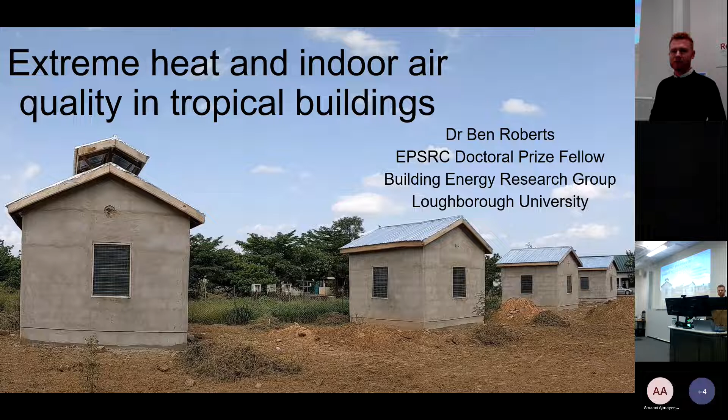So just a quick background on me. I joined Loughborough 8 years ago. I was part of the CDT, similar to IRBI. It was the precursor to IRBI, which we're all part of today. But prior to that, my first degree was actually in geography. I don't come from a hard engineering background. And then I first got interested in energy with an energy policy master's, also at Exeter. And then since then, I've been at Loughborough doing my MRes, my PhD.

And then since 2019, I've been a research associate working on 4 different projects. And it's REFIT, which is the one I'll focus on today. That's the first project that got me involved in doing research in tropical climates. And then this year, I've just started my doctoral prize fellowship, which is all about doing research in tropical climates. But just to identify a few of the key collaborators, I'll probably mention these names today, so I thought it's best to talk about them up front.

We've got Professor Kate Gough from Loughborough University, Department of Geography. She's someone who's really influenced my career in the last 2 years. She's been working in Ghana for over 30 years, and she has set up 2 recent projects. She's actually a social scientist herself, but has become really interested in the way that people experience heat in their homes. And she's very interested in how people who have home-based enterprises work under extreme heat conditions.

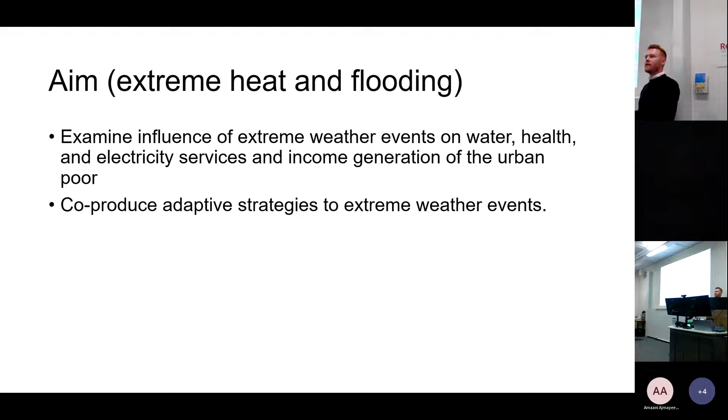events, heat and flooding, affected water, health, electricity services and also income generation with a specific focus on the urban poor. And then they wanted to start looking at adaptive strategies to these extreme weather events, and they didn't quite get there. And that's where REFIT, which is the next project, comes in. So I'll be talking today purely about our research in Ghana. For those of you who perhaps aren't aware, it's a country in West Africa.

There's the three largest cities. We work in two of those. We work in Accra, which is this city right in the south of the country, the capital, by the coast. It's very warm most of the year, but very humid. I've been there when it's been probably late 20s, early 30 degrees, but around 80 to 90 percent humidity. So really hot and humid, very uncomfortable to be in.

The second city we work in is up in Tamale in the north of the country. This is very different. The heat is a lot higher. We've been there when there's been 42, 43 degree weather, but the humidity tends to be quite low, around 10 or 20 percent. So actually I find Tamale much more comfortable to be in because you can evaporate your sweat and cool down despite the much higher temperatures.

We know that climate change is going to be a significant issue for the whole of the African continent, and there will be asymmetric warming, particularly along the African continent. In Ghana alone, about a quarter of the population is identified as poor. So these people are particularly vulnerable to high indoor temperatures and heat because they can't afford things like air conditioning.

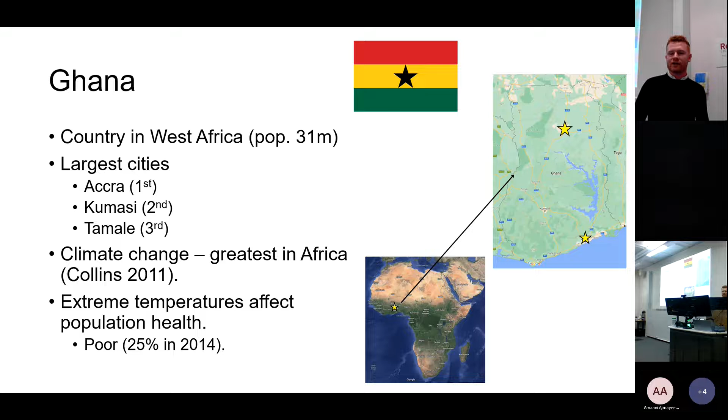We at the moment almost universally work in informal settlements. This is an example of an informal settlement that we work in Accra. This is called Agbogbloshie, which is famous for the world's largest electronic waste dump. So a lot of the electronics that you throw away, if they're not properly recycled, end up right next to this settlement. And informal settlements are places where the urban poor live.

They tend to be not government approved settlements. So at any point, the government can come in and destroy all the homes in this area. And so people tend not to want to make massive investments in their living environment. Also, people just don't have much money, so they can't make a lot of improvements to their homes in terms of adapting them and retrofitting them to make them more resilient to extreme heat.

The previous project looked at indoor temperatures, so air temperatures, dry bulb temperatures only. I know I've just mentioned the importance of humidity, but the early project just looked at temperatures. Working across the two cities, Accra and Tamale, they monitored indoor temperatures in over 130 homes using these very small, tiny tag sensors. They're waterproof, they have quite a good battery life, and they're quite strong and tough, so they're a good solution for monitoring temperatures in this kind of environment.

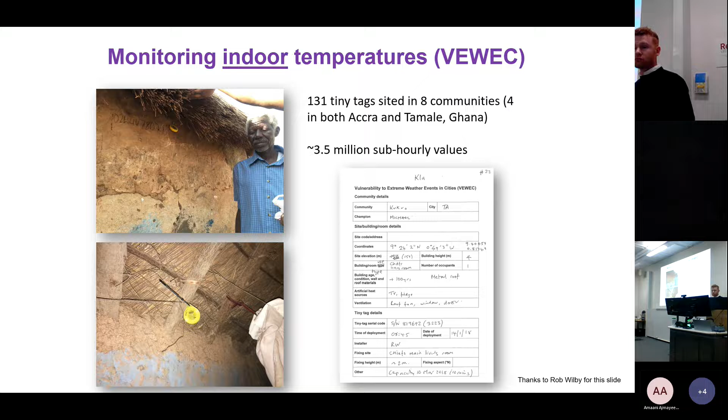And they sampled a number of homes which encompass different building types, different materials. So, for example, a thatched roof, a tin roof, wooden walled houses, concrete walled houses, houses that were under the shade of trees, houses that were exposed, and started to compare the temperatures that were recorded in all these homes.

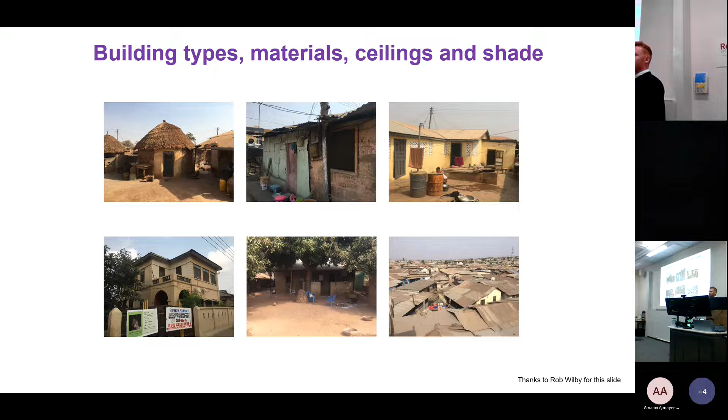What was quite shocking is some of the temperatures recorded were very high. The highest temperature here, 45.5 degrees. This is a living room. It's right next door to a bakery, which probably contributes to some of the heat. The oven is in a big room next door with this living room attached. They bake bread all night long, which is the time when about 8 or 12 women sleep in this room with their young children.

It's otherwise quite poorly ventilated. You can see this small window here - that's the only ventilation in that house. And you think 8 or 12 adult women plus children sleeping in there. It's quite uncomfortable.

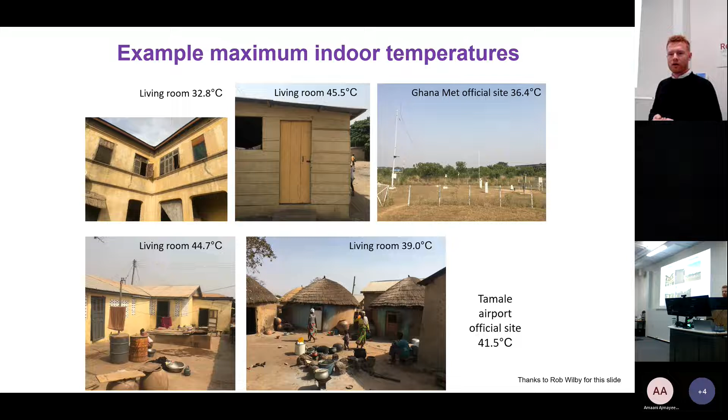One of the key comparisons that was made was the effect of roof material on indoor temperature. They contrasted thatched roof dwellings with metal roof dwellings. On the x-axis we have time, and on the y-axis we have temperature. The dark solid black line is the outdoor dry bulb temperature. The brown lines on this graph are the indoor temperatures in all the houses with thatched roofs, and on the right-hand side we have the indoor temperatures in all the houses with metal roofs.

What you can see is that with the thatched roof, the indoor temperatures were generally quite stable. They didn't fall very far off in the night, but equally they didn't shoot up during the day. Contrast this with the metal roof - massive increases in temperatures during the day, but comparatively lower temperature at night. So what we can say from this is if you want to spend your time in a room during the day, go in a room with a thatched roof.

If you want to sleep in a room, choose a metal roof. Unfortunately, most of the rooms in the settlements we work in are multi-purpose rooms. They're living rooms, sleeping rooms, cooking rooms, and very often workplaces as well. So there's always a balance between the design of the building and the temperatures and the time of day. We haven't solved this problem just yet.

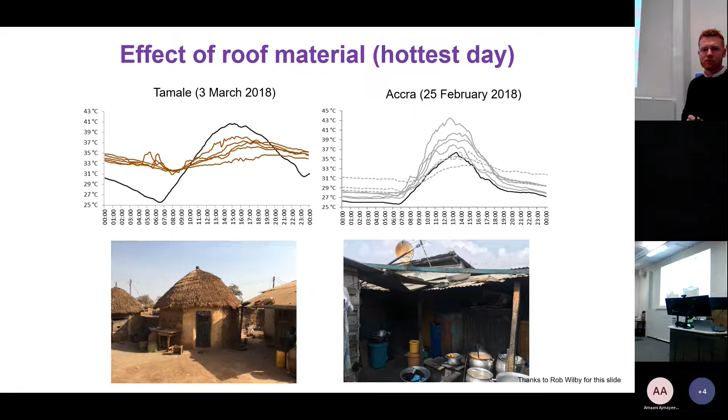Unfortunately, people are moving away from thatched roofs despite us showing that they are generally cooler during the day. They're not culturally acceptable to many of the people in the settlements who have told us this. Partly because they're a fire risk, they harbour insects, snakes, and lizards. The thatch isn't necessarily grown close to where the houses are, and the local craftspeople who used to make the roofs are moving away or losing the skills.

People much prefer tin roofs. They're cheaper, easy to install, and that's a sign of modernity. So unfortunately, what we see is a movement away from thatch, which is perhaps a better solution in terms of extreme heat, towards metal roofs.

VEWEC was all about identifying the problems, and REFIT, which is the project I'm involved in, is about solving some of these problems, improving building design. It's called REFIT: Reducing the impact of Extreme heat to improve well-being in cities.

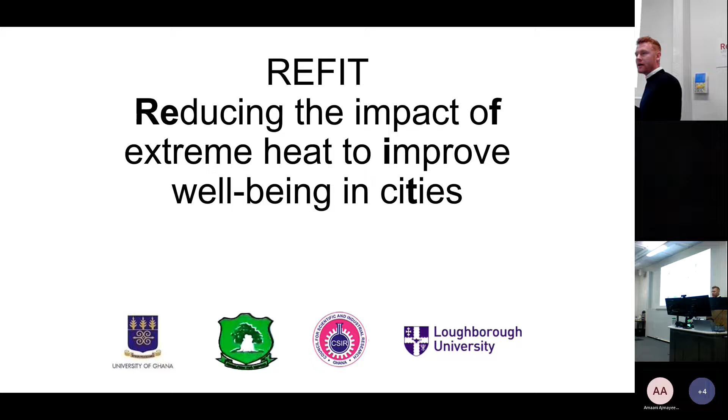Once again, the core team of Loughborough, University of Ghana, and University for Development Studies were involved. We also brought in the Council for Scientific and Industrial Research, Ghana, who had building consultants advising on the project. And Kevin, Effie, and I were brought in as the engineers and architects on the team to help inform the building design. The main aim was to co-develop.

So that's develop in combination with the people who actually live in these informal settlements, not us coming in and saying 'you should do this, we think this is the way,' but to co-develop low-cost, affordable interventions for retrofitting informal dwellings and workplaces in culturally sensitive ways. It must be done in a culturally sensitive way, otherwise people aren't going to want to make these changes to their homes.

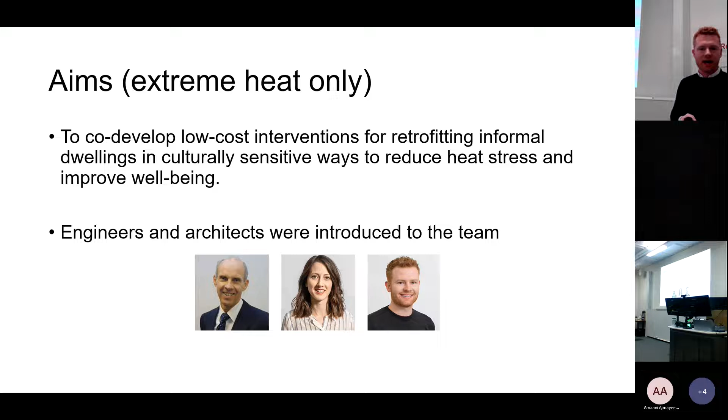And the ultimate aim is obviously to reduce heat stress and improve well-being for the people who live there.

Just got a couple of photos here. This was back in February 2020, my first ever trip out to Ghana, right before the COVID pandemic. At this point, when I was out there, the stock market had just crashed and someone said, 'oh, that's a bit strange.' We didn't really know anything more than that, but yeah, that was an interesting time.

On the right-hand side we have our Accra team, and on the left-hand side the Tamale team with our advisory boards. In both locations we have an advisory board of local architects and government officials. We have someone who designs the building regulations for Ghana, and people who work in hospitals and healthcare advisors to advise us on the project.

We're now working in just 4 settlements, not the 8 as in VUEC. So we have Alajo and Agbogbloshie in Accra, and Kukuo and Lamashegu in Tamale. They're reasonably similar, but they differ in location: the Tamale ones have higher temperature and low humidity, while the Accra ones have lower temperatures but high humidity.

The Accra dwellings tend to be built of wood, with wooden walls. In Tamale, it's much more common to have really thick concrete, sandcrete, or mud walls. This was the first time we went to Ghana.

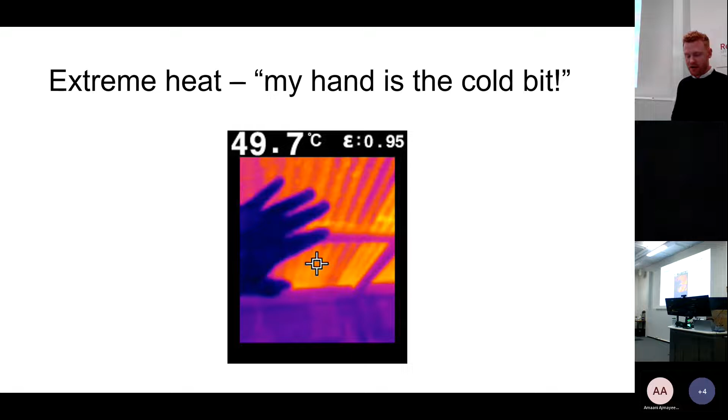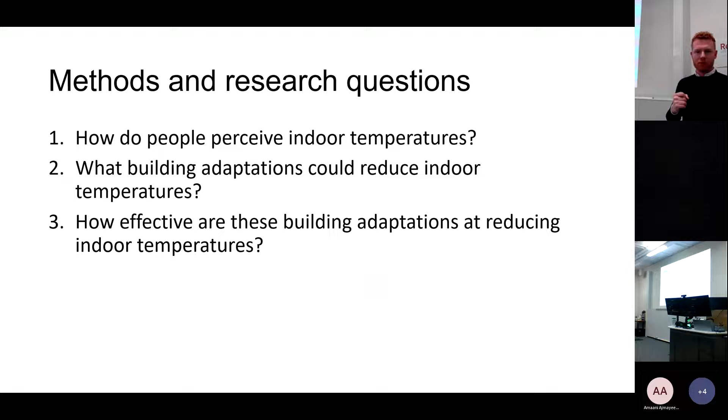So for the refit project, we had the following research questions, which then map onto our methods. We want to know how do people perceive indoor temperatures, what building adaptations could reduce indoor temperatures, and how effective are these building adaptations at reducing indoor temperatures.

The main question we want to know is how do you feel right now, in this environment in terms of temperature. They answer on this scale from neutral up to hot, down to cold. At the same time, we take note of what they're wearing, because the clothing you wear influences your body's ability to lose heat to the environment.

We also ask what the person's currently doing. For example, this lady here is a seamstress, so she's sewing and cutting things and walking around her shop, and her body's obviously heating up. Someone who's just laying around in bed or sitting has a much lower metabolic rate, so they'll feel cooler potentially. At the same time, we measure some other variables.

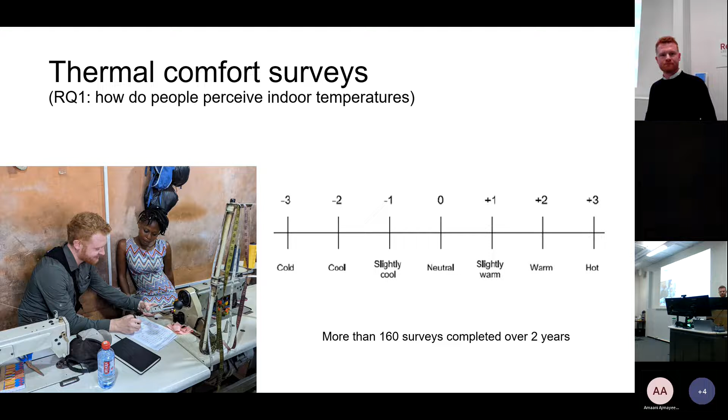The other thing we've done to answer research question 1 is this: the seamstress may well be in her room all day sewing, but other people are in and out of their room all day - perhaps the room's just too hot for them to be in. So there's no point going in and doing a comfort survey, because they're going here, there and everywhere, sitting under a shady tree to cool off. So if we're trying to find out the actual temperature that people experience...

This is quite a hard thing to do. What we did is put these small sensors - iButton sensors, very small and lightweight - and asked people to wear them either around their neck or on their wrist, using a special mount we designed. Of course, it's quite close to the body, so you're getting the interaction of the body's heat with the sensor. It's a method we're developing and exploring, but we've got some fairly interesting results because we combined it with diaries, which is probably the more interesting thing.

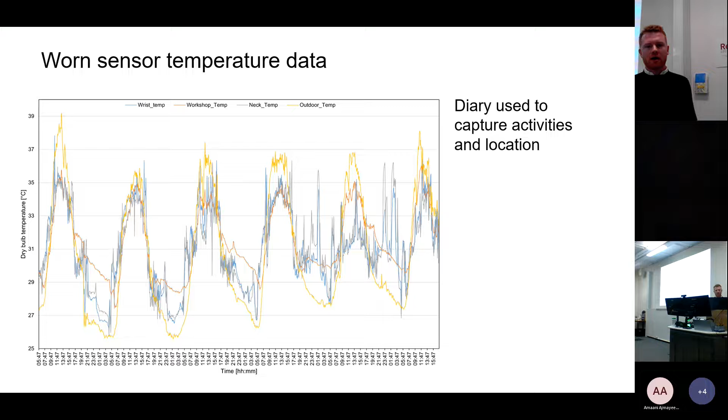You can also see there's other strange points where the temperature goes much higher than what he's actually experiencing. Perhaps he's gone for a walk outside, or had to go to the local market. That's the kind of thing we picked up on with this diary.

It was a WhatsApp diary. So whenever the person did something different or went somewhere, they WhatsApped one of the research team, and we had the time and what they said.

So here are some examples: I'm at the shop, I'm doing some ironing—ironing produces heat, so we could potentially look for that in the temperature profile. Then he says, okay, at 1:34 I'm going out, so you know he's left his house. He's given us a lot of information about walking in the sun and the temperature.

We had this for about 12 people who did these diaries. It's quite a lot of data to analyze with all the diaries and temperatures. We haven't got much further than this yet, but as a group we've learned some interesting things.

Methodologically, this is the first time we tried out this neck sensor and wrist sensor. Some people said, I don't like wearing the wrist sensor because I'm trying to wash my clothes and keep having to take it off and put it back on—it's getting wet. But down in Accra, in the capital, people said they didn't like the sensor on their neck because people kept coming and asking what it was. They much preferred a sensor that looked more like a watch on their wrist.

So there's just a few interesting things to think about for future studies. We also need to think about the difference between the temperature recorded on the wrist and the neck, and we've done a few pilots where people wore both sensors at the same time to see if there was any difference in temperature.

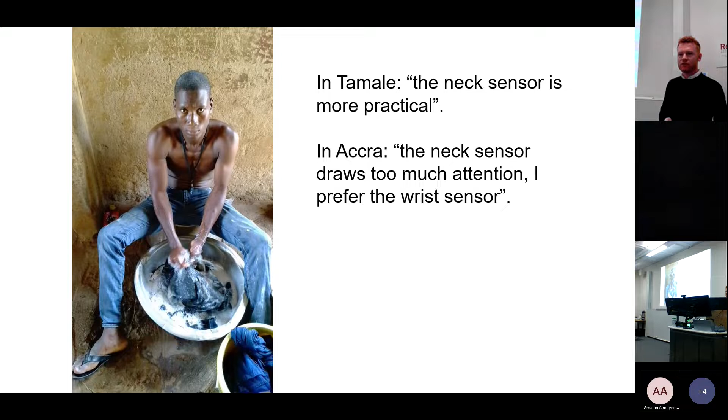But this is really multidisciplinary research. We're not only doing the engineering and architecture side, measuring temperatures, we're also asking people using photo voice interviews. What we did here was either one member of the research team followed a person around for a day, or we gave someone a camera and they went around their daily activities taking photos of things.

For example, this is a place where I feel hot, or this is a place where I feel cool and comfortable. Then we went back and interviewed the people using the photos they'd taken as a prompt, and they'd tell us about their experiences and how they felt. We asked people to take photos of specific building materials they liked or disliked. It was again a very useful experience.

During these interviews, we also asked people about the acceptability of different interventions we might propose, such as what if we changed your ceiling insulation? We've seen in some houses people started putting plastic bags suspended on nets above their ceilings—so would that be something acceptable to them?

Could we plant trees around your house? Speaking to people in Tamale, they wouldn't plant a tree themselves because they say if you plant a tree, you won't live long enough to see it bear fruit. Their belief is that if you plant a tree, you'll die before it's mature.

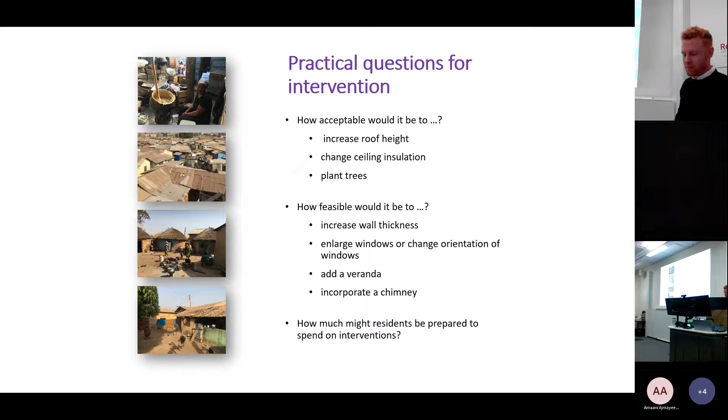We also asked about different feasibility issues and how much people would be willing to spend, because obviously we can't suggest something so unbelievably expensive that people can't afford it.

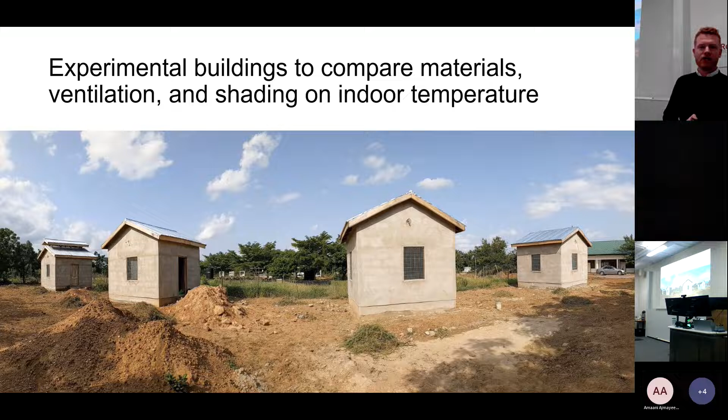So back onto more of the engineering and architecture side, we have built some experimental buildings, and we've constructed these to compare the effect of different material types, ventilation and shading on indoor temperatures.

So this is the method we use. It's a matched pair method, which NASA have also used. So NASA got a pair of twins who were physiologically almost identical. They sent one up to space, kept one on Earth, and they brought the one back down from space and compared their weight, their muscle mass, and saw how they changed. And basically, the intervention there was that one was in space and one was on Earth.

We've used exactly the same method, but instead of sending these houses into space, we're going to change the roof type or change the ventilation type, always keeping one house on Earth. So one house will always be the same. It will be our control house, which we then always compare back to. And the thing we compare is the indoor temperature.

We measure the indoor temperature in all 4 houses, keep one house the same, change the roof type on one, and the other maybe change the roof to a thatched roof, and the other house maybe an insulated roof, and then compare it back to that original house under the same weather conditions, and we can see the effect of that intervention on the temperature.

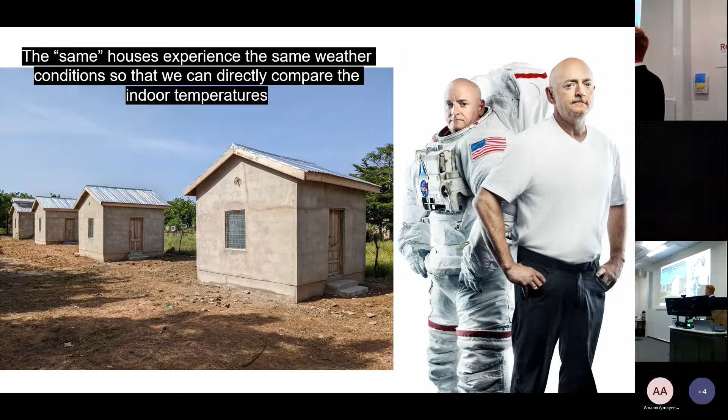The first stage of informing our design, which relates back to research question 2, what building adaptations could reduce indoor temperatures, was we used dynamic thermal simulation to design our building. So instead of building these 4 test houses and scrabbling around trying to decide what we did, we tried lots of different things, lots of different roof types, lots of different wall types. It gave us the opportunity to do it very cheaply and very quickly, to see which was the best option, best retrofit to cool the dwellings.

And what we found was having a really highly ventilated roof structure with then an insulated roof ceiling underneath was one of the best options for keeping the indoor room cool, both day and night. The thatched roof, which I keep coming back to, was also quite an effective measure.

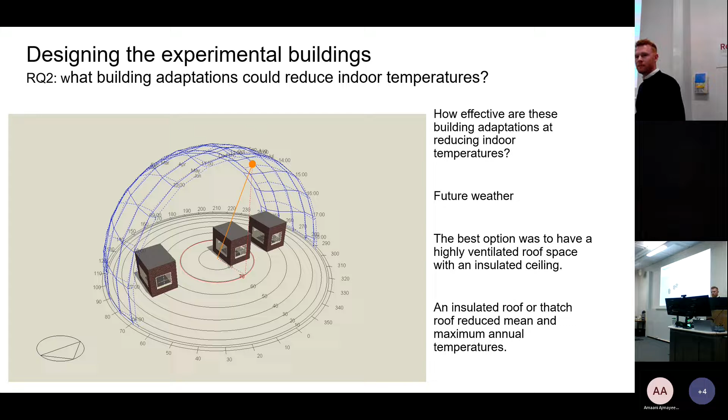So from there, we took what we'd learned with the dynamic thermal simulation and drew up some plans for the 4 houses. And we discussed this with the wider team, with the advisory board. Here's the local builders. We were saying to them, is this feasible? Is this what you would usually build in the communities? Because we wanted something which was close to what they actually use in the communities, because then when we make our retrofits, it seems reasonable and believable.

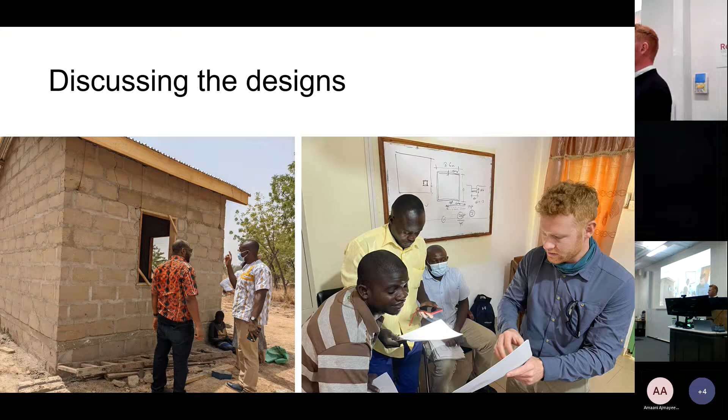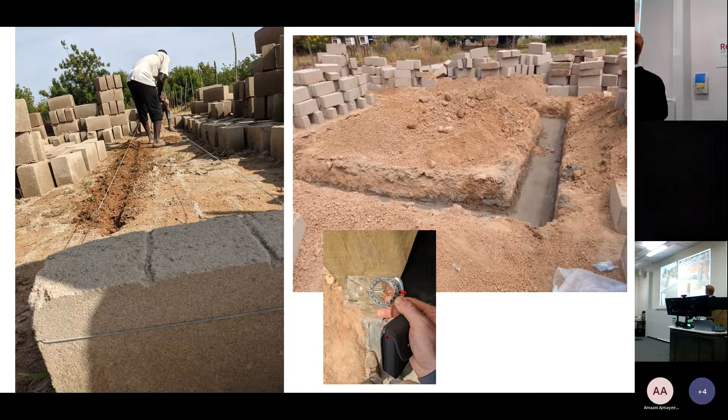So back almost a year ago, we broke ground on the experimental buildings. And then here's some photos of them laying out the foundations. The front door faces south on all 4 houses, and it was pretty much perfect based on the compass. And we chose to build the house out of sandcrete blocks.

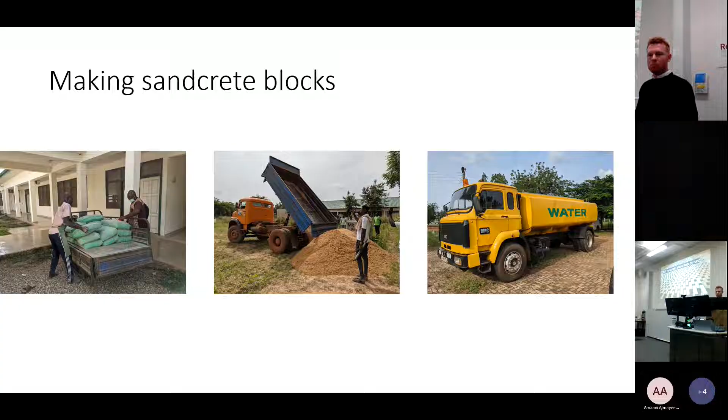And sandcrete blocks are a mix of sand, cement, and water. And they mix it on the ground, put it into stainless steel metal molds, compress it down, and then just tip the block out. And it took them about a day and a half to make 600 blocks. And they're all laid out and they dry in the sun in about a day.

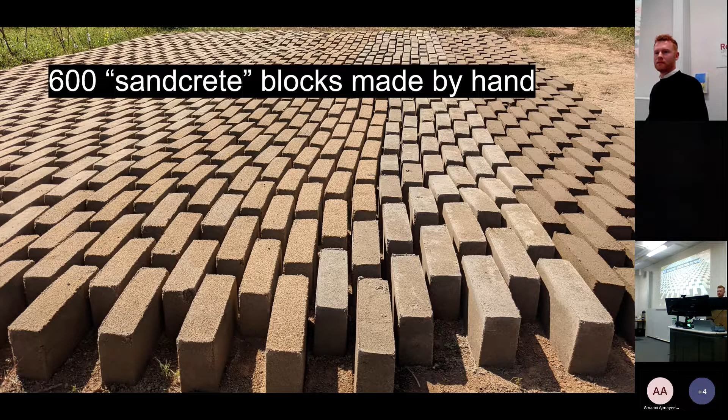We chose sandcrete blocks because that's what most of the people in the communities we work with were building their houses out of. So we didn't want to start with our base case houses as something crazy. We wanted to stick with what they were using. So here they are, dry within 1 day. We're able to stand on them.

We then had to go and choose the roofing material for the base case houses, so for all 4 houses. And everyone's using this tin now. This is what everyone likes to use. But it's so thin, it's very, very light. You can almost bend it with your hands. It's not like if you ever go down to B&Q or Wickes, the stuff we get in the UK, much thicker. It's very, very thin and lightweight. And because of that, when the sun hits it, you get almost immediate transmission of heat through it.

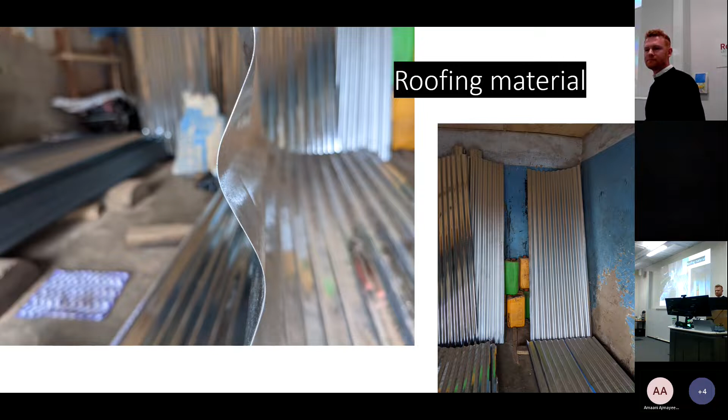In the future, what we'll do is, so you can see this, the mason here is blocking up the gable end. In the future, we may take that out again, put a ceiling underneath, and then have a really well ventilated roof space. We've also got plans to obviously change the roof type. We'll put a thatch roof on one of them and increase the ventilation openings. So there's going to be vents at all different parts of the house at different heights, and see how that affects the indoor temperature.

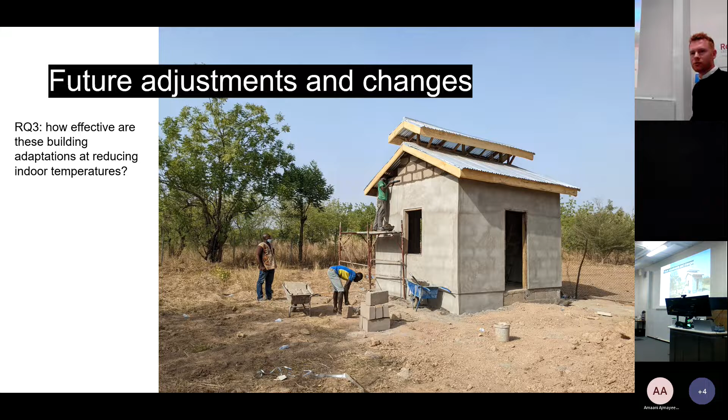Again, with the sense of realism, we put both burglar wire and mosquito mesh on the houses, because obviously this is a malaria zone, so that's what people will use, but it does restrict the ventilation, obviously.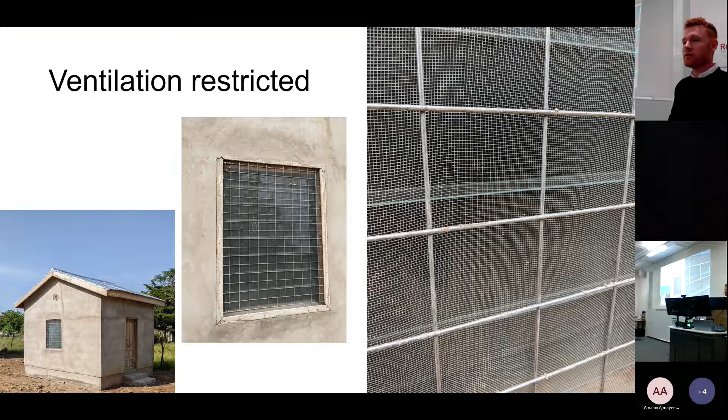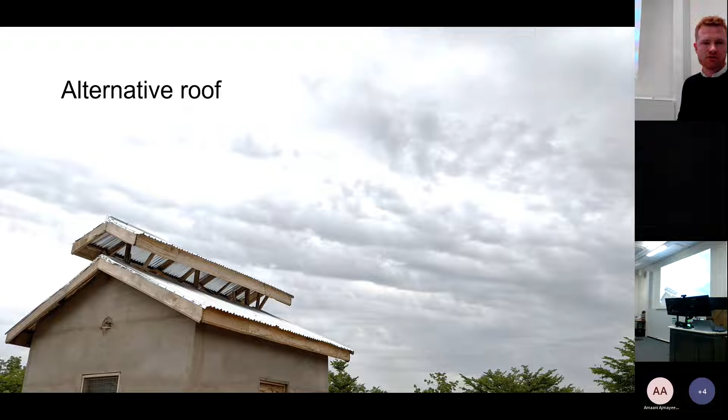So this is the alternative roof design. This was kind of our, okay, it may not be culturally acceptable, affordable, but it's probably one of the best options for cooling the house. So let's see if we could do something quite innovative and interesting. So there's a hole the full length of the ridge, which allows air to hopefully move up through and out of the chimney exhaust system whilst blocking the rain off.

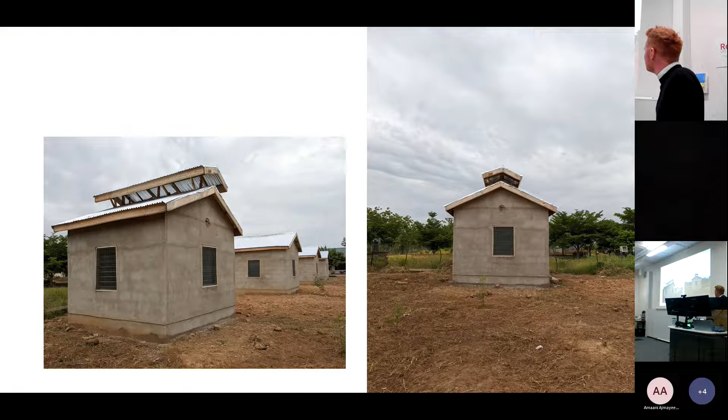Yeah, a few people have expressed issues about this in Ghana to do with bats entering and birds entering, and it being a potential mosquito entry point. So it's by far the coolest of the 4 houses already, but perhaps not culturally acceptable and quite difficult to build. The builders had a lot of trouble building this. So, you know, plenty to think about here.

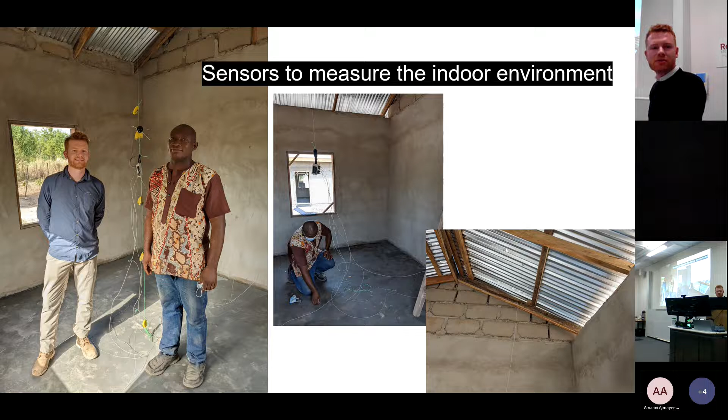So inside the house, we used some battery-powered sensors to measure the air temperature. We also measured the roof temperature, the floor, the temperature of the walls, and we did that with battery-powered sensors because we didn't have any power to the house at the time. It was the quickest, cheapest solution. And then we also measure weather on site.

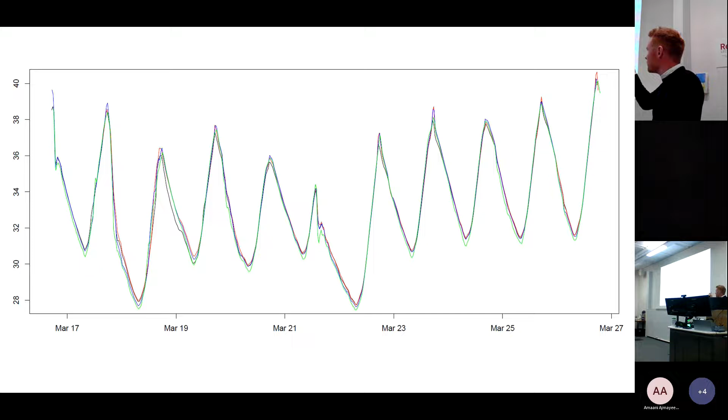And here's a bit of data from the first test we did. So all 4 houses operated identically. And we were pleased to see that the measured indoor temperatures in all 4 houses were very similar. What we didn't want to see was one of the houses having a much higher or a much lower temperature, because when we come back to compare the 4 houses, what we want to say is, okay, the temperature difference in house 2 is purely down to the intervention made. It's not because there's some other defect with the house. So this was a good sign for us.

Okay. So just now to talk about my most recent work, my fellowship. The VUET project did a little bit of monitoring in hospitals. And what they found was that extreme heat affects patient well-being and recovery. So the place where you go to try and get better, hospital, is not necessarily the ideal place if it's exposed to really high indoor temperatures.

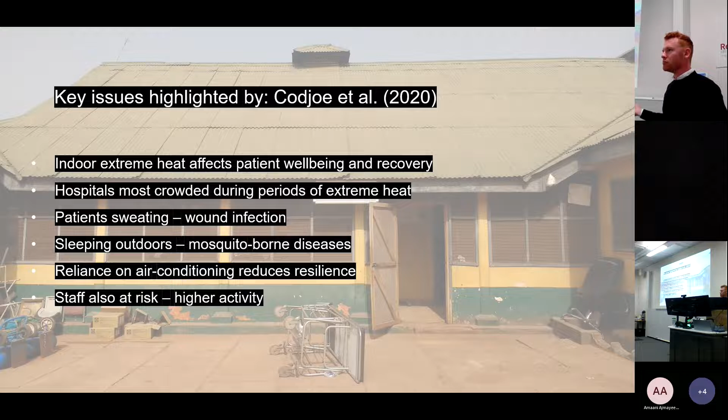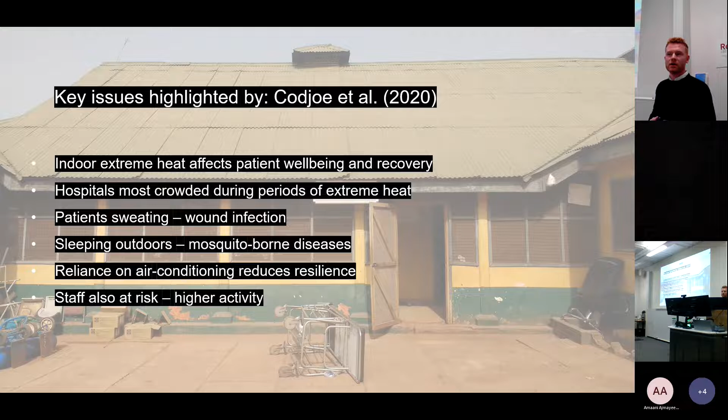And the hospitals are most crowded when it's hot. So people are getting ill in their homes, all going into hospital, which is becoming more and more overcrowded, more and more hot. If people have got open wounds and they sweat because they're too hot, that can cause infections. And there's also records in these hospitals of people sleeping outdoors. So they've been admitted to hospital, but because it's so hot, they then go and sleep outside and are exposed to mosquitoes, which potentially leads to malaria.

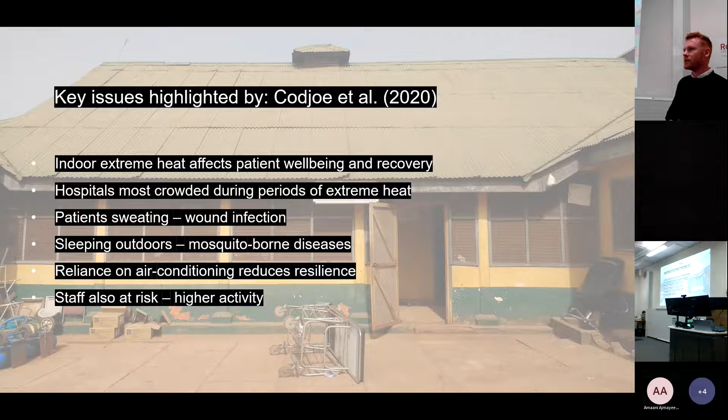The hospitals don't like to rely on air conditioning because the power supply, at least in the northern part of Ghana, is quite intermittent. So you can't rely on air conditioning to provide cooling when you need it. And we also need to think about the staff, not just the patients, because they're the ones who are running around, getting warm, lifting people up, and also wearing PPE, which increases your sensation of being hot.

We are aware a lot of the literature shows that newborn babies and pregnant women are particularly vulnerable to extreme heat. And it was back in 2020 when I first went to this hospital and I was taken into the newborn intensive care unit, and I had a temperature sensor in my hand and it was 35 degrees inside this intensive care unit. And obviously you've got the most vulnerable people in this very, very warm space. So it's a real health issue. And I thought, okay, we're not addressing this on refit, but for my fellowship, this is where I wanted to come and base my research.

One of the things we noticed in this hospital is that there's potentially some good options for ventilation and ventilative cooling. There's some holes in the roof, but some of them were blocked, and it was a bit confusing. Clearly, someone had designed the building to be quite well ventilated, but perhaps the building wasn't currently being operated in the most efficient way. And I was at this hospital back in June, and I was told that this used to be a school, and then it was converted to a hospital. So perhaps during the change of use, that's when some issues cropped up.

I've also got some modern hospitals that I work with. This hospital was built in the 1970s and then later extended. And the trend in modern buildings in Ghana tends to be to use sliding windows. And these are a bit of a problem because if you can imagine, had this been a louver window,

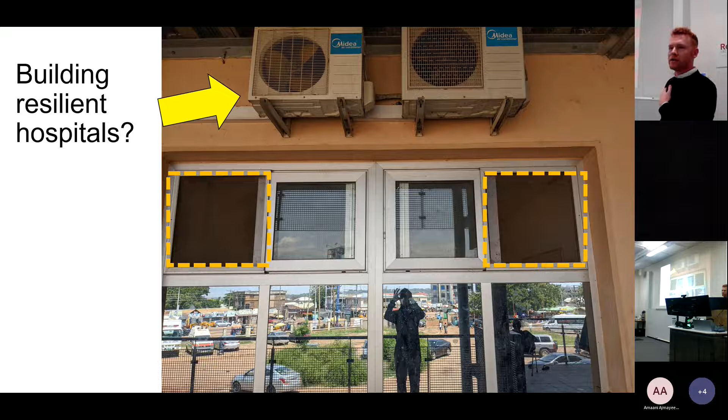And so I became very interested in air quality, learned about the different methods that we could use to collect and analyze data. And then I incorporated this into my fellowship, which is now trying to deal with both low and zero energy cooling, so keeping hospitals cool without using air conditioning, whilst providing good indoor air quality to dilute airborne viruses and prevent mosquito-borne diseases, so stop mosquitoes entering.

So you can't just have huge holes in the wall, which may well provide cooling and dilution of airborne viruses, because mosquitoes will come in. You can't tighten it all up to stop mosquitoes coming because then you probably can't cool it and you can't dilute your airborne viruses. So it's kind of a three-way problem to solve.

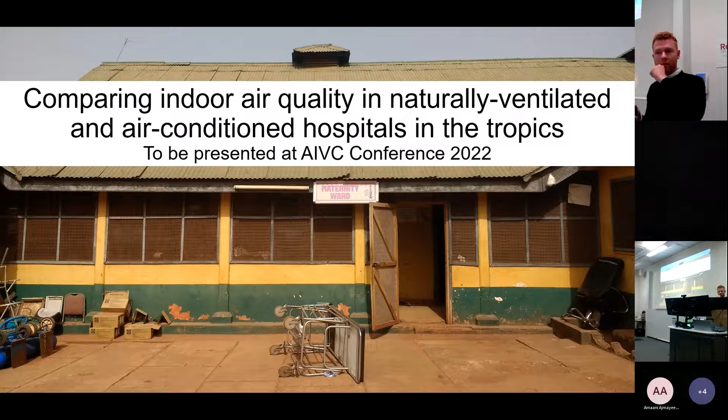And the data I collected in June, I've just written up into a conference paper, which I'll be presenting next week at the AIVC conference. And what I'm focusing on is, okay, if you put air conditioning in a hospital to keep it cool and provide thermal comfort, how does this affect the indoor air quality?

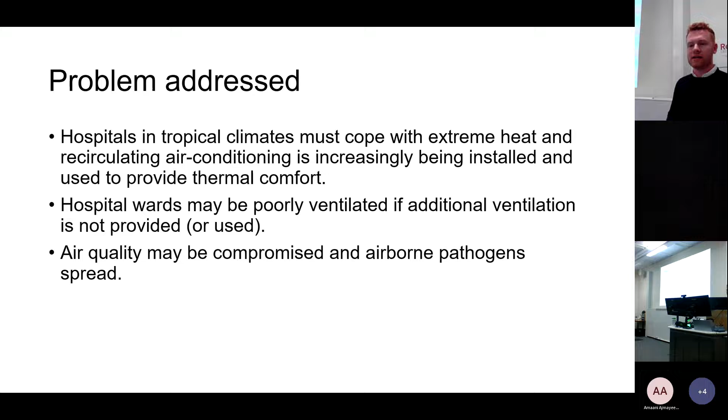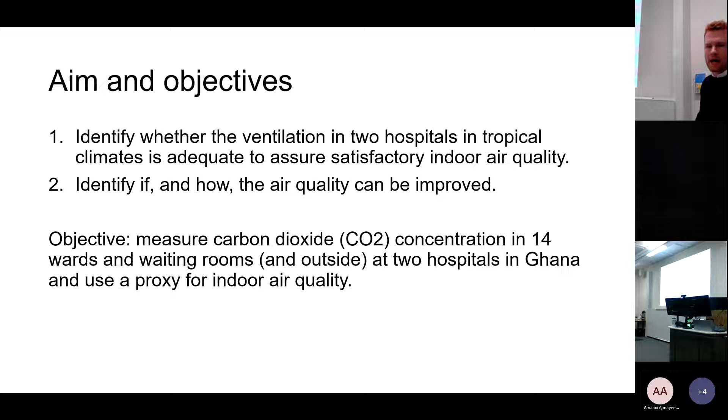So I've got 4 hospitals in my sample, but for this paper, I just focused on 2 of the hospitals, just to initially see if the air quality was satisfactory, where it could be improved. And I've got Children's Hospital down in Accra, and then the Tamale Hospital up in Tamale.

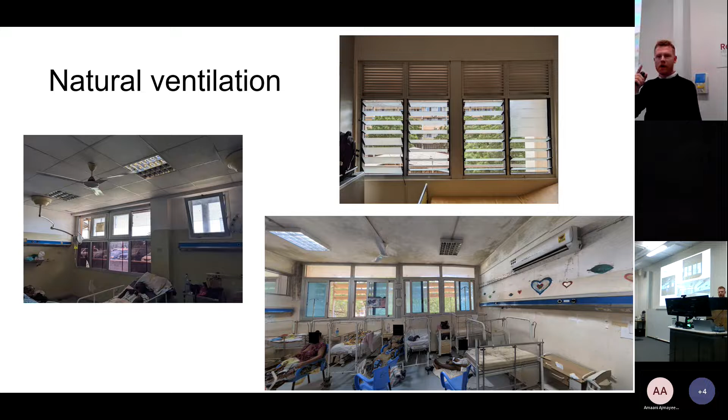Most of the wards tend to be naturally ventilated. Here's the louver blades that I was talking about earlier, the tilting glass blades, in one ward. In the other one, you've got tilting windows, and this one you've got sliding windows. So there's a real mix of ventilation options. But notice this here, this is a recirculating air conditioner. So this provides cooling without introducing fresh, uncontaminated air to the space. And this is where the problems start to arise.

So we're obviously all aware of the issue we've faced over the last 2 years with the pandemic. We believe the way that the SARS-CoV-2 virus is transmitted between individuals is primarily via the airborne route, either droplets, so larger virus-laden droplets which fall to the floor quite quickly, or smaller particles, virus-laden aerosols, which are so small

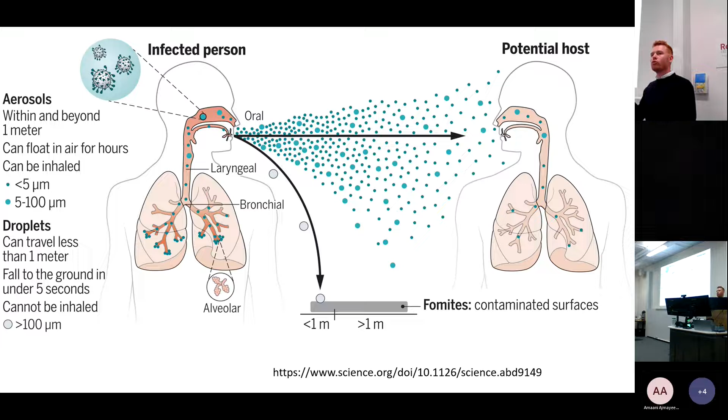they float around in the air and can potentially be breathed in by someone else and the infection transmitted. So we're concerned in this study with long-range aerosol transmission. Now, the aerosols are emitted when people are breathing in and out. Something else happens when you breathe in and out. You breathe out carbon dioxide.

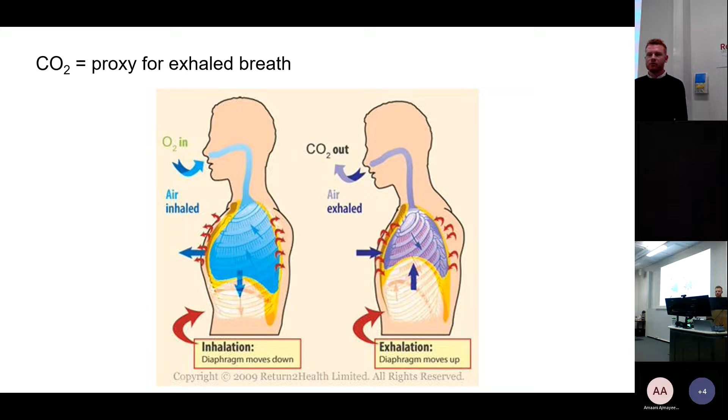And if we can measure the carbon dioxide concentration in a room, we can understand people's exposure to exhaled breath, which may or may not be contaminated with virus-laden aerosols. So I used some small CO2 sensors. I've got one of them here, quite unobtrusive, battery-powered, logging to the device.

I mounted them in 2 different hospitals and logged the CO2 concentration alongside temperature and humidity. And you can see a few of the sensors in place. I tried to put them in discrete places where kids weren't going to go and play with them. At the same time, I wanted to be able to measure the CO2 concentration in the room, so I couldn't shove them away in a corner.

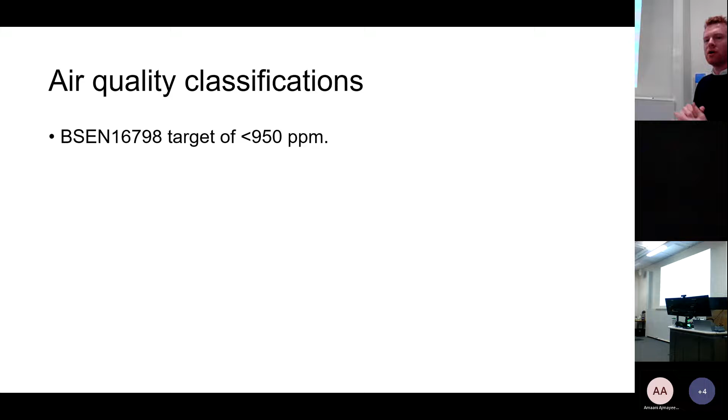I also talked to the staff and trained local PhD students how to use the equipment. So very open about what we're trying to do, and very forthcoming with the knowledge that we were gaining. And this is what we want to do. We want to keep CO2 concentration below 950 parts per million. That's our aim in these spaces.

I've been logging data since June, but I've just selected a small component for my conference paper. So during the monitoring period, the temperatures were quite cool, people were telling me. So 28, 29 degrees. We probably wouldn't consider that cool, but in Accra and Tamale, they said it was cool. So that perhaps influences how people were using the ventilation systems, opening, closing windows. We'll see if it changes as the year goes on.

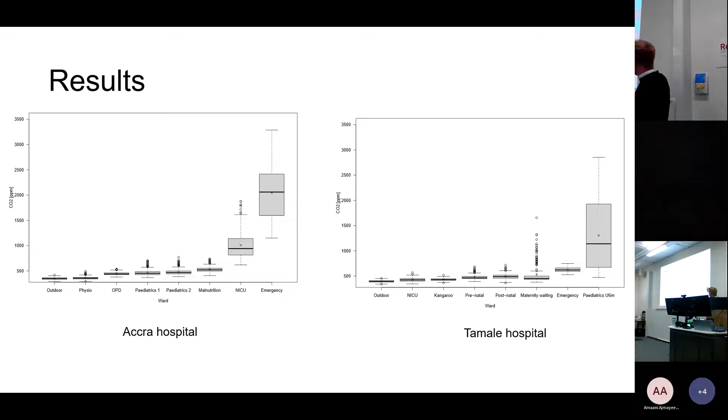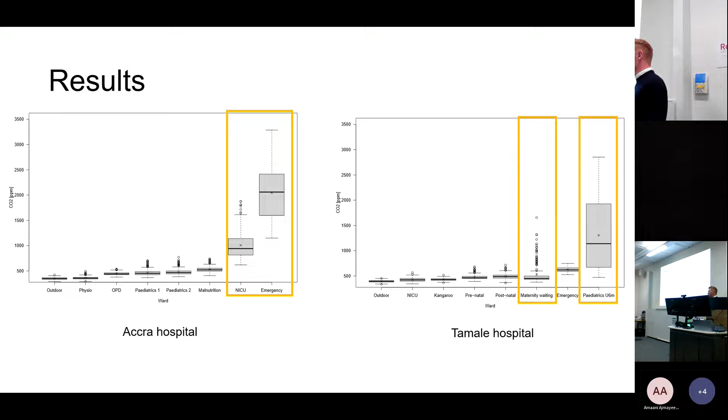So remember that 950 parts per million, we want to keep it below this. And most spaces in both of the 2 hospitals, the air quality was satisfactory. It was below that 950 parts per million target. You can see a few of the wards, there were a few issues. And the thing they all had in common, these were the wards with recirculating air conditioning, where people would close the windows, turn on the air conditioning, restrict all the ventilation.

Here's the Pediatrics Ward, which I showed you earlier. What was happening was the parents in the ward were telling the staff to close the windows because their children were cold. You were then getting a buildup of CO2, and overnight, to stop mosquito entry, so mosquitoes are most active during the night, they were just using the air conditioning to provide comfort. At 6 o'clock in the morning, the windows were all opened and the CO2 level dropped.

So what this shows is that the fact that the ventilation wasn't operated properly, or there wasn't enough fresh and uncontaminated outdoor air allowed to enter, that potentially increased the risk of airborne virus transmission.

Saw the same thing with another ward. This ward was almost fully enclosed. There were other wards around it, so really not much of an option to ventilate this space. Very small windows, tucked behind beds, so really hard to open, and consistently high CO2 concentrations were recorded in this space. So compare this to outdoors, about 450 parts per million, indoors up to 3,000 parts per million, which really is quite a worrying sign of the quality of the indoor air.

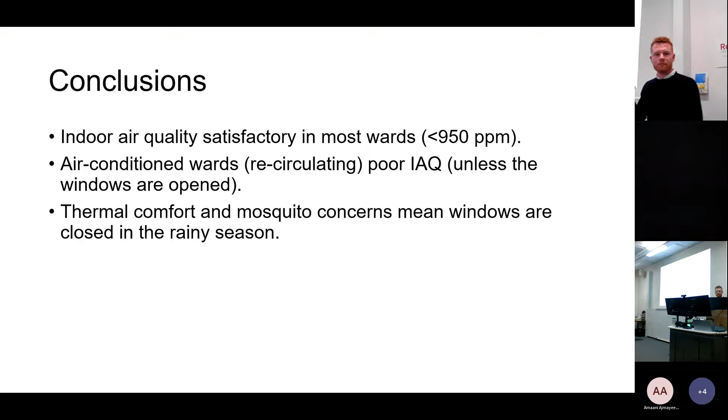So whilst the air quality was satisfactory in most spaces, it was the air-conditioned wards which were at high risk of poor indoor air quality. And it's the other drivers, thermal comfort and mosquitoes, that are driving this choice of ventilation and impacting the air quality. So yeah, please, if you'd like to read the paper, just drop me an email.

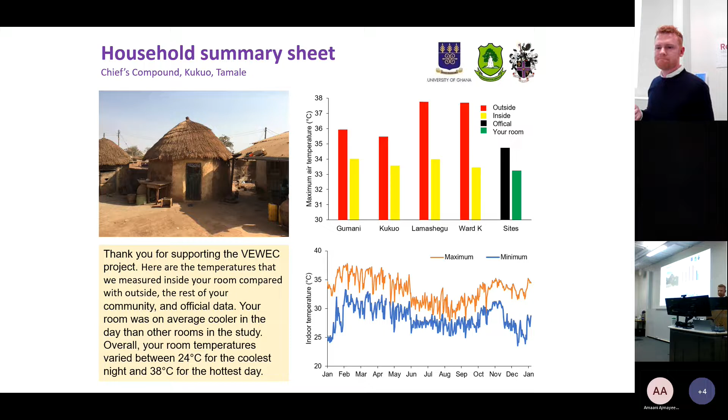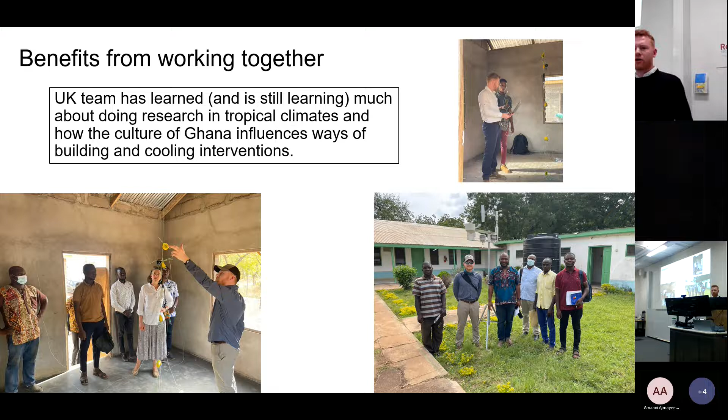We've obviously got a lot of benefits from working together. The team is now really highly trained, and we as UK researchers have learned so much and are still learning about doing research in tropical climates and how the culture of Ghana influences the ways of building and cooling.

So the future will be another fellowship for me. Hopefully we've got some more grants going in. I hope if any of you are interested, you'll consider doing PhDs in this area. I've got some ideas, and if you've got some ideas, please approach me. And that's it, thanks for listening.